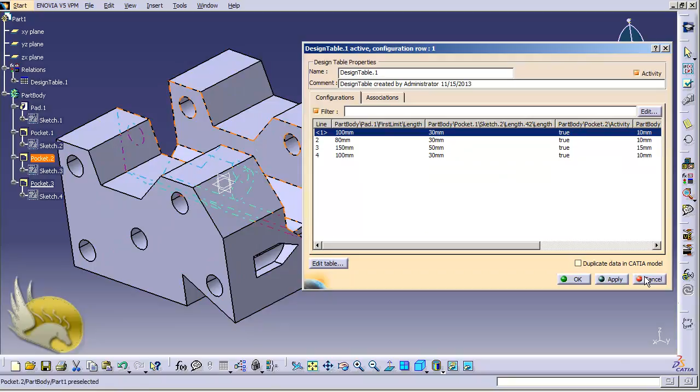Beside the design table, there is a Knowledge Inspector here. I can click on Knowledge Inspector and see what if I change my configuration to another configuration that I created in the design table. You can see that right now configuration number 1, that is the default configuration, is selected and my part is in this situation.

Now I have two agents here. One is the What If agent and the second is the How To agent. I'm going to talk about the What If agent right now. I have 4 different configurations in my design table, and you can see the parameter here shows me that the first configuration is selected. So I'm going to make the second. So I click on 2 and click on Apply.

Now you can see that before changing the configuration, it tells me what happens if I select that configuration. So I'm going to expand these a little bit, and this one again. It tells me that the first configuration is this. The second configuration has some changes, and these changes are like this.

The first limit of the pad is right now 100 millimeters, and the new value is going to be 80 millimeters. So the new value is smaller than the current value. And again, you can see that the second limit is going to change because I have a mirror in my pad. So the second limit is exactly the same as the first limit. It tells me that the new value is going to be 80 millimeters and it's going to be smaller than the current value.

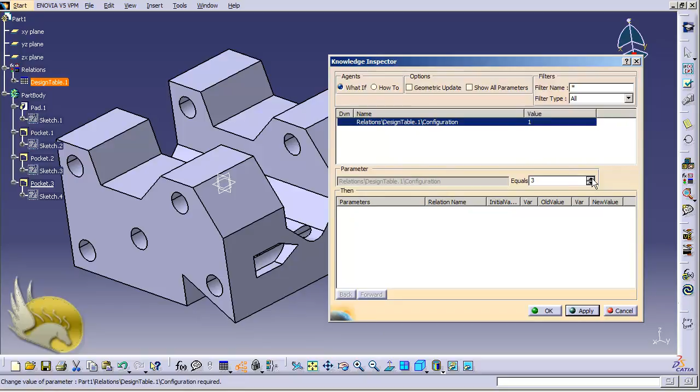Let's cancel this out and again go and select the Knowledge Inspector. I'm going to select this configuration and go to the third one. By clicking on 3 and clicking on Apply, I can see that again some values are going to change, and I'm going to check these values. You can see that 4 values are going to change after applying this configuration.

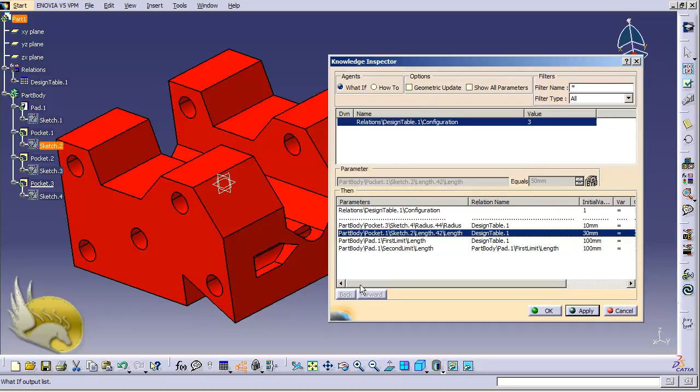The first one is the radius of this sketch. You can see that it is highlighted on my part body, and it tells me that the current value is 10, but the new value is going to be 15 millimeters. That's going to be bigger. And again, I have another thing here that is the length of the sketch; if I move this a little to the right, you can see this measure here. It tells me that right now it's about 30 millimeters. The new value is going to be 50 millimeters.

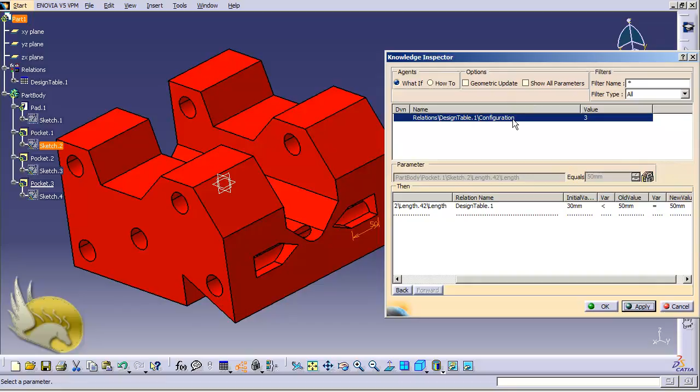So I can see the changes here and I can apply these changes. If I apply these changes, you can see that the change is applied to my shape. Select this, click Apply again. And of course, I can have different configurations like this. So the Knowledge Inspector tells you what is going to change after selecting some configuration.

Now I'm going to create another design table, and I want to show you what happens if I select an existing design table to create a new part or change the new part's configuration. I want to select Notepad as my default tool, and that is easy to use because I can select the tab delimited file right here.

So I have 3 values here. The first one is going to be X. I press tab once. The second one is going to be Y, and tab. The third one is going to be Z. Now I have 3 different dimensions, and I want to show you what happens if I apply some simple configuration to my simple shape.

The X value is going to be, for example, 50. The second one is going to be 50. The third one is going to be 50. In a second configuration, I want the X value to be 100. The Y value is going to be 50 again, and the Z value is going to be 70 millimeters. In a third configuration, I want the X value to be 50.

The Y value is going to be 100, and the Z value is going to be, for example, 80 millimeter. And of course I can have different configurations applied to my shape. Right now I save this as design table 2, and now that I have saved this, I close this and close this part again. I'm not going to save anything here.

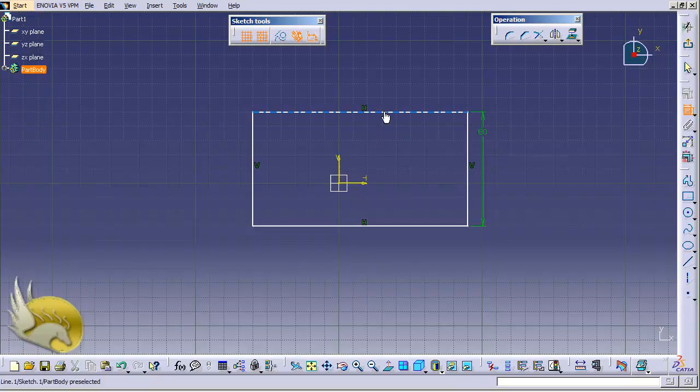I go and create a new part by typing new part here, and the part is going to be Part1. That's okay for me. Now I'm going to use, for example, YZ plane or XY plane. XY plane is better. Create a simple rectangle and add in some constraints like this. I'm going to add a specific constraint. I right click on these, go to properties.

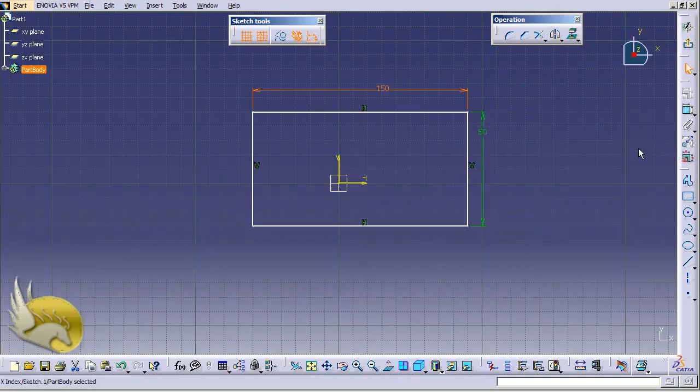This is my Y value, I guess. I rename it to Y, for example, Y index, and click OK. I can show this, of course, but that's okay here. I right click on this and go to properties and rename it to X index. And now exit my workbench. I add some padding to my shape, and this shape is going to have about 20 millimeters of padding.

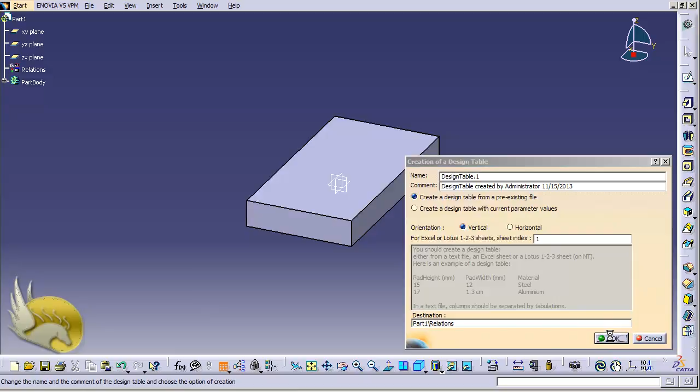That's okay. Right now I want to add a design table to this shape and apply the file that I had created previously. So I go and click on design table or type in the command design table. Now it tells me that I can create a design table from a pre-existing file. So I select OK, and the pre-existing file is a simple text file that is design table 2. Now I need to associate the values, and I don't want it to be automatic. Maybe this is not okay. I click on no and tell it I'm going to do this manually.

So I have this. I go to the associations tab, and you can see that 3 different columns are recognized here. The first column, and I want to expand this to show you that I have some values here. If I cannot find the indexes that I have created, I can go to my shape. Let's pan this to the left and open the part body here. Open this case. You can see that I have some constraints. I want to open the constraints. You can see these indexes that I created here.

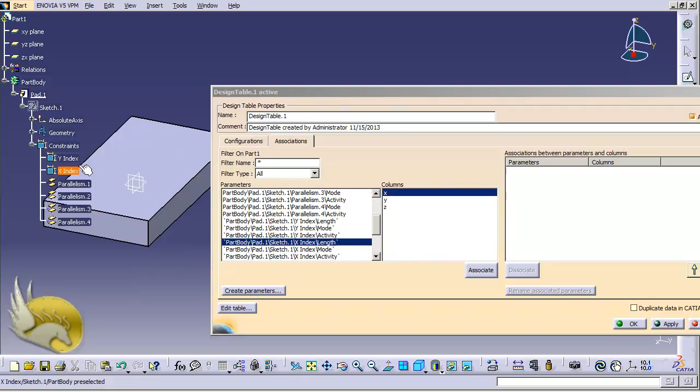I want X to be associated with X index. So I click on X index. You can see that it is selected here. Because it has a lot of parameters, I cannot find it easily, so I clicked on the constraints tree and it is easier. So I click associate. You can see that it is associated right now. I want to associate the Y column to Y index here. So I select Y index and click on associate here.

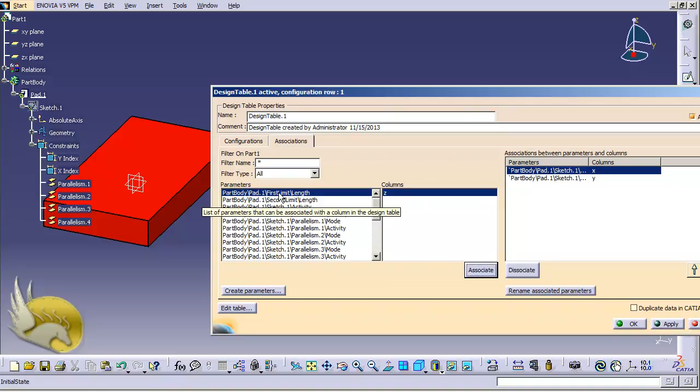And the Z column is going to be associated with the pad first limit. So this is the pad first limit, so I associate this with this. So I click on OK. Now I have to zoom this out using control page down, and that's going to be a very big shape because I have not associated the units, but that's okay. If I added some millimeters in front of those, that would be okay. So I should add mm in front of the values so that I have the correct measures.

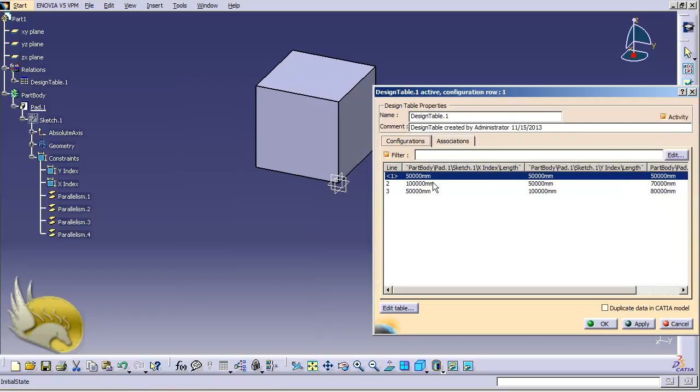Now I open the design table from relations because I have created the design table here. I open this. Now by double clicking on this, you can see the design table here. Let's make it a little smaller. This is the first configuration, and I double click on the second one. You can see it like this, and again I open this and I apply the third one. You can see it like this. So this is easy, but you can have some complex configurations from the things you have.

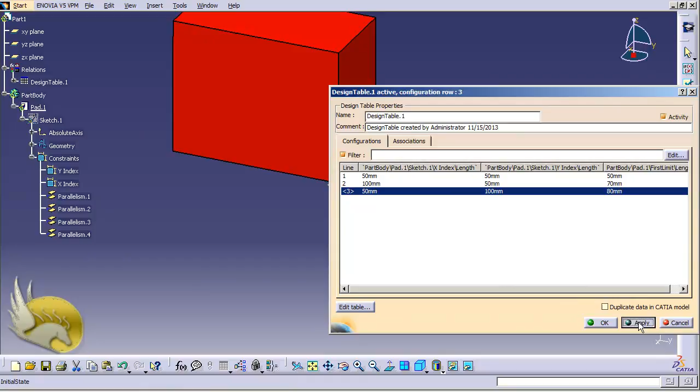I edit the table, and now I add mm in front of these so that I make sure that everything is in the right units and not like this. I save this configuration, close this. Now I'm going to have this synchronize and click on apply. You can see that now I need to use control page up to make this as big as I wanted previously. So you can see the configuration here. You can change the configuration using these values, and you can create your design table.